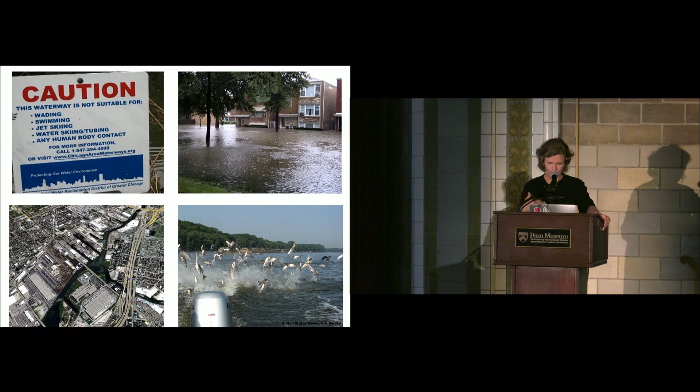Over the years, another vein of research has been on these waterways and spaces in the post-industrial landscape. We produced a book called Reverse Effect that explored the results of the reversal of the Chicago River. Originally the river was flowing into the Great Lakes, Lake Michigan, and about 100 years ago they reversed that flow to take the waste and pollution downstream. Today we have issues like water quality and flooding, and the danger of invasive carp coming up the Mississippi and making their way into the Great Lakes.

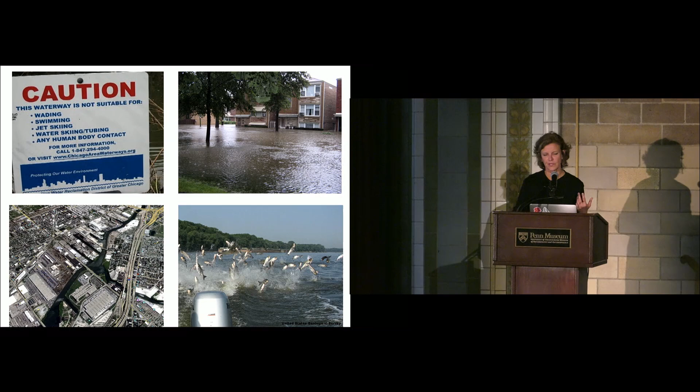So the river has a lot of issues, but it also has great potential. As you can see in the lower left, this former industrial space with privately held edges of the river could now somehow become a place for the city to make public space or give people access to the waterways. In Chicago, when we were doing the book, we started interviewing all the people using the river, even though it was polluted—people rowing, fishing, using it for tourism.

We decided to do a publication that would help public knowledge about the river, the conditions of the river, and what the future could be if it were to change. We took these images and, with help from engineers—I think architects are very good at connecting technical information and making it understandable—showed how the river could one day be disengaged from this reversal, and that our wastewater could be renewed and returned back cleaned to the lakes.

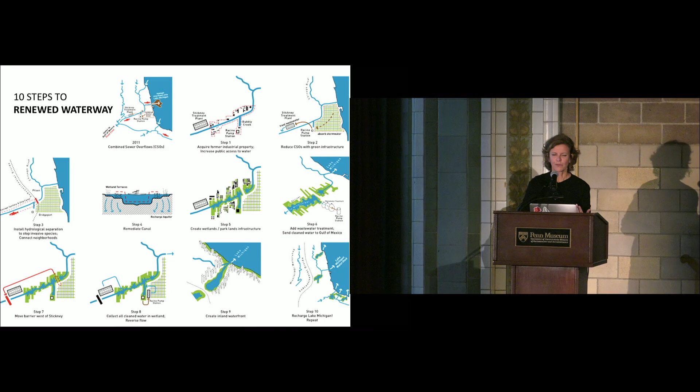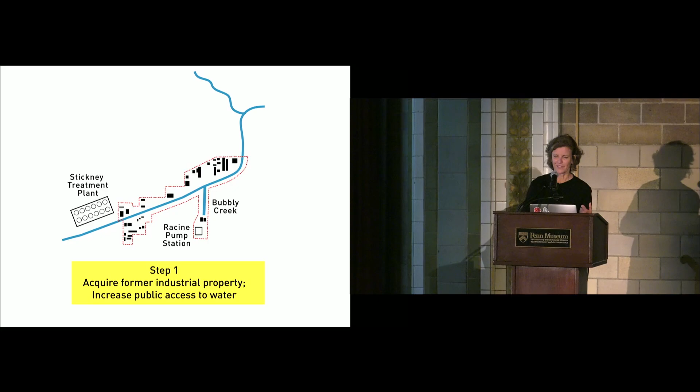In this book there was a series of steps to follow, and step number one was for the city to get some control along this river's edge and bring it back into public use. The reason being, if people can access the river, that's the only way they are going to be able to care about it. Sure enough, we got a new mayor in the city who took a look at this book—he probably heard it from other people too—but he really embraced the idea of making this river the new recreational frontier for the city.

Mayor Emanuel planned 4 new boathouses along the river, and we actually got to do 2 of these boathouses. The first one on the north side, in a place that was former industrial space, had a very limited time and a very small budget. We designed a boathouse that could also be used in the winter for training. These rowing clubs already on the river now have this as their home, using indoor tanks for training, and different groups like disabled veterans are also learning how to row, because rowing helps you prepare, be a good team member, and helps you mentally and physically.

What really makes me excited is seeing that this once abandoned riverfront is now an active place for engagement and for youth in the city to use. For the architecture, it really was important for us to make something exciting.

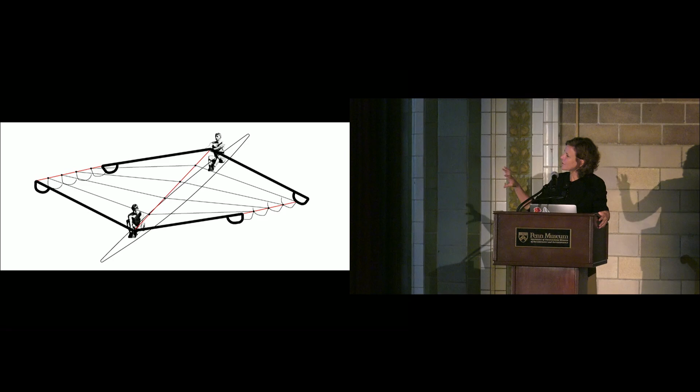We were interested in using the motion of these oars as a prompt. We looked at the whole flow of the oar and turned it into this roof form, using straight members like the oars, creating this up and down truss system that gives you a dynamic roof form, but also allows daylight in to warm the space.

It's been amazing to see this come alive and be one of the first steps. Now the city is also doing things downtown along the riverfront, trying to turn it into some big asset. I think this could be happening in Philadelphia as well.

This was really about discovering the work of Marie Tharp, who was an oceanographer. She was working at Columbia, and she had this theory that the ground under the water was almost mountainous, and at the time everybody thought that was very crazy. What she was doing was plotting this data from soundings. Because she was a woman, she was not allowed to go onto the boats and study the ocean, so she relied on this data, and she created this incredible drawing and map panorama of the underneath side.

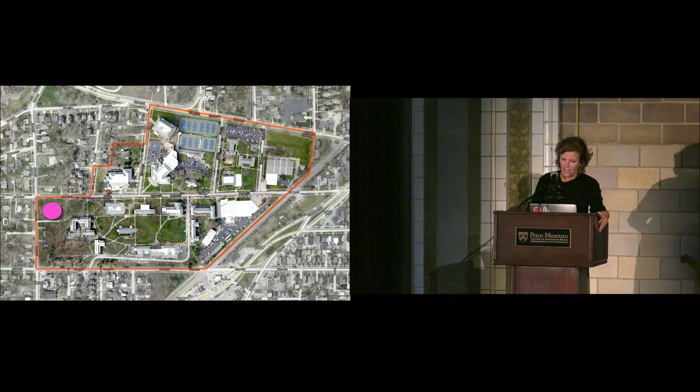One of the projects I wanted to show tonight is called the Arcus Center for Social Justice Leadership. This is a small project that's 10,000 square feet in Kalamazoo, Michigan. There's a small college campus there. The pink dot is where the building is located.

They have a strong social justice leadership program on this campus, and they wanted us to design a building that could both fit into the campus but also be the first ever building that's about social justice. The campus has some traditional brick buildings and some maybe postmodern brick buildings as well. But it felt awkward to use brick in this case, given the colonial aspect of the design of these buildings, and the client really wanted something new.

Because there was no precedent for a social justice center, we started to study the space where social justice happens in cities. What we found was it happens in the streets and the plazas and spaces like that - the demonstrations that are a result of so much planning.

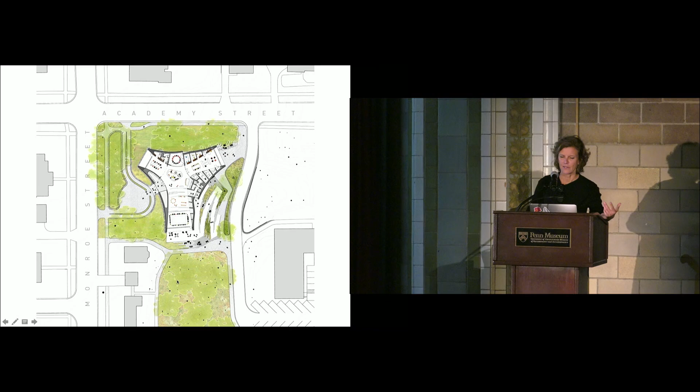That was something we heard from all the faculty there. They said what really breaks down boundaries is preparing food with each other, and sitting around a hearth so the neighbors can be invited in. It really wasn't easy to get a working fireplace and a kitchen in this academic building, but because it was so central to this idea of social justice and creating these relationships, we were able to get it through.

And so now the space can work for small groups and large groups. They have seminars there, conferences, and faculty spaces for work and classes. It was really an amazing project to work on, fun to try to understand what it means to be a space for social justice leadership.

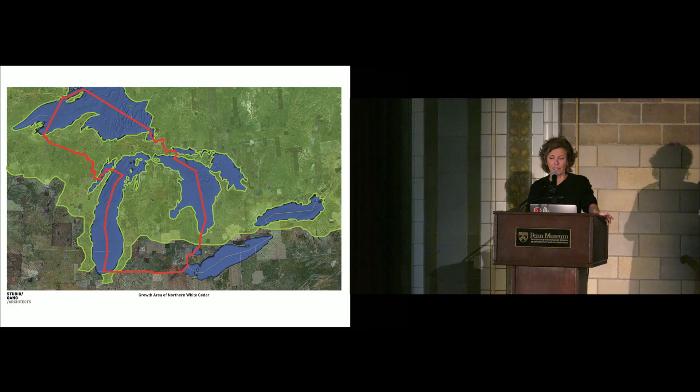One of the things that was interesting in terms of materiality was as we were driving to Michigan for some of our trips, we came across these amazing sustainably harvested forests. This is a white cedar forest, they grow white cedar which is very resistant to rot and insects. We stumbled upon this barn and other buildings done with this incredible wood masonry, some people call it cordwood masonry.

We started to wonder, what if we could revive that technique for this building? Because it really represents this idea of coming together with neighbors to build a structure and a really strong community.

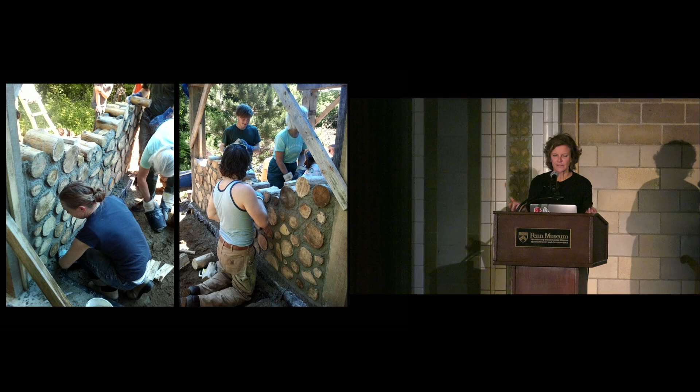Lo and behold, we found this couple, Rob Roy and Jaki Roy, who actually knew how to build saunas out of this technique. They were going around doing little workshops with people building saunas, so we asked them to come teach us and our contractors and masons how to do a cordwood masonry wall.

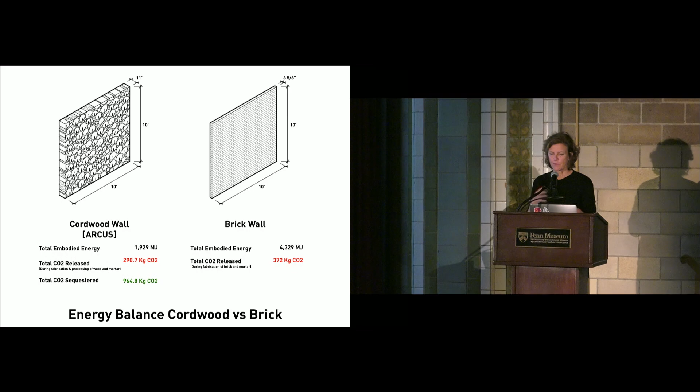The beauty of this wall is that it's really sequestering the carbon. If you think about a tree growing, it's absorbing carbon through its entire life. Then what you do is just dry this wood out. Actually, we dried out the wood for a year prior to putting it into the wall. So there's very little fabrication energy put into this wood, it goes right into the wall.

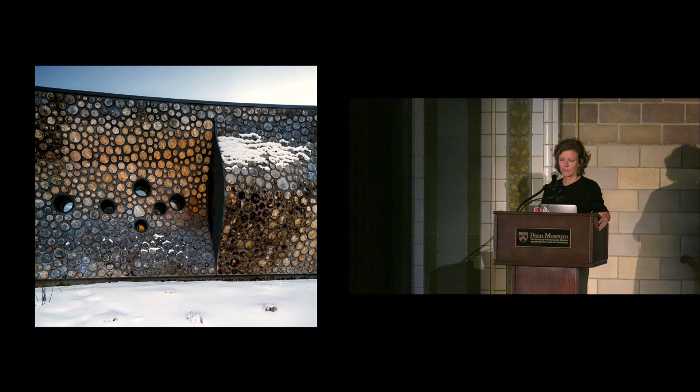And it ages too, with beautiful weathering to this material, and it really has a quality that connects it both to the brick campus, I think, but also makes something new.

Now this campus has really grown in terms of the number of events they hold for social justice leadership. They are really thriving as a school. And it's because of place, that there's a place they can gather, and it's a place that has an identity, no longer having to plan these things in the basement of a school where they used to be. So it was about creating relationships and basing the design on that.

In terms of tall buildings, they're oftentimes thought of as structures that are isolated or sometimes off-putting for community purposes. But we've been really interested in how tall buildings can also create community, because it's really the future, we need to make denser, more compact cities. So how can we encourage community in these tall buildings?

With the Aqua Tower, we were really interested in using the materials, the concrete, in a way that would give a benefit to the apartments, giving terraces so people could step outside and even see their neighbor.

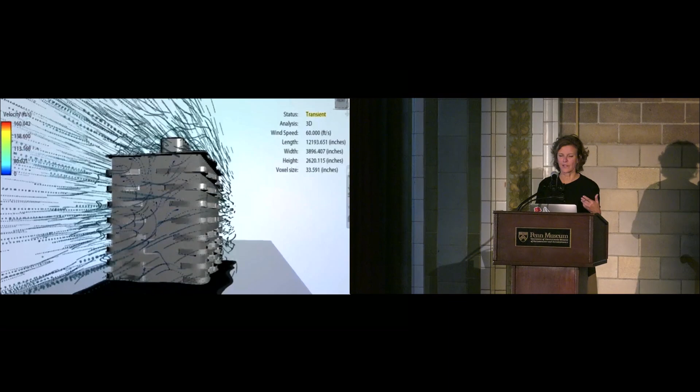We tested this in wind tunnels and found that the variations we were showing in the slabs were actually reducing the discomfort of the wind. In other words, you can use the balcony for a longer period of time in the year.

It was really based on this idea of using that space outside the building for social purposes, for connecting to the environment, connecting to the neighbors, and not thinking of a tall building as just a stacked place for privacy, which was really the feedback we were originally given. So we said maybe these offsets of these balconies could also allow you to have sight lines to your neighbors.

So it turns out that this building really attracts a lot of extroverts, let's just say. It's like people that want to be out in the city. There's a lot of students from the University of Chicago Business School that live there, empty nesters, people moving back into the city.

But one of the things I wanted to do better on was the performance of the building. Even though it's a LEED certified building and has pretty good performance, one of the issues is how the slabs could be disengaged from the inside.

So on the next building, we tried to find ways to improve the performance and also to continue to think about the social qualities. Not everyone's an extrovert—some people are introverts, and we wanted to make a building that could be used by both people.

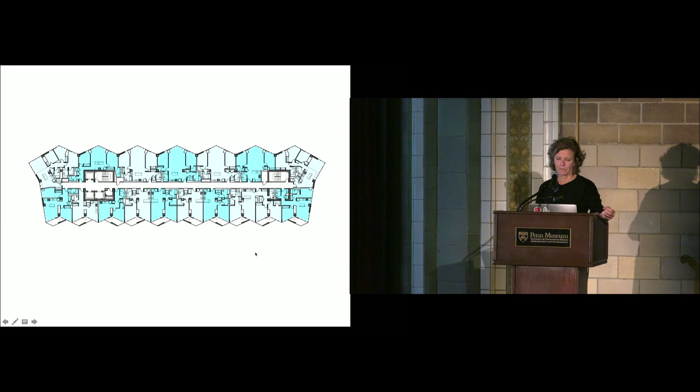So with the tall residential buildings, we've really been interested in how to make them more social. Here you can see the structure of the building.

These offset concrete panels are the columns of the building, but they also allow us to eliminate columns on these bay windows. You can see that the slab here is picked up by the panel here, but it's also hung from this panel, decreasing the span and allowing us to go column-free on the bays. But also, the key thing is it is the structure, so it's impossible to value engineer it out.

You can see the detail of this. This building went on a site that was a former strip mall, but now it has co-working space, a Whole Foods market, retail space, and on top of the plinth there's some social space for the building, and then rental apartments above that.

From the south side, you can see these, what we call balcony stems. The idea is that they take the gravity loads all the way down to the ground, but then there's an array of these stacked, almost like cards, stacked up that create this very dynamic outdoor space. You can see in this image the loads being taken down to the ground on the green stem—that's one of the stems.

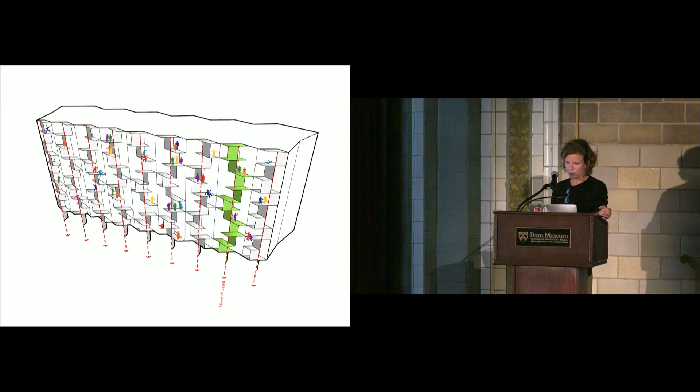What this does is it allows us to disengage the slab on the inside of the building from the slab on the outside of the building, so it can improve performance. Anyway, that's what we're testing on this building. I'm not 100% convinced it improves the performance that much, but that was the concept of it.

And you can see this incredible, almost Escher-esque space that's quite amazing in there. You can't look into someone else's apartment, but you can see them if they're out on the balcony. So we really treated this as a kind of threshold space.

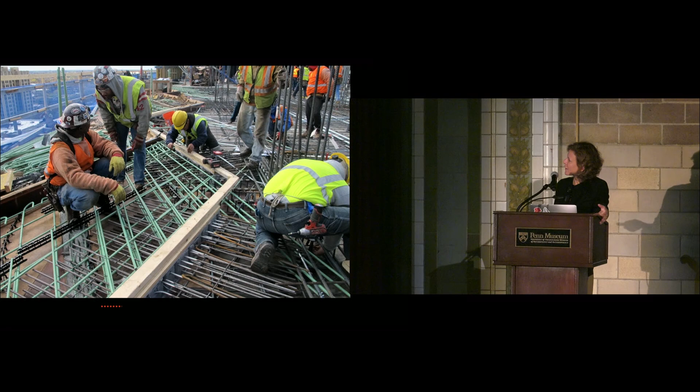And here is installing the thermal break, which is the first time it's ever been done in Chicago, by the way. We were really pushing for that on this project, and luckily we were able to get it installed and also install sensors so we can do a comparison of the performance—it's when you have a slab inside and a slab outside, to reduce heat loss.

But this is an ordinary building. It is not an expensive building, it's regular apartments. I've always felt like architects need to put our attention somewhat on living space in the city, because it is the DNA of a city. But normally these kind of buildings are really very basic and not very exciting.

So I'm happy to always be working on projects that I think will improve the city. This is one of them. Again, it's not a very expensive building. In fact, it was stalled after the 2008 downturn, and then suddenly it came back and turned from condos to apartments.

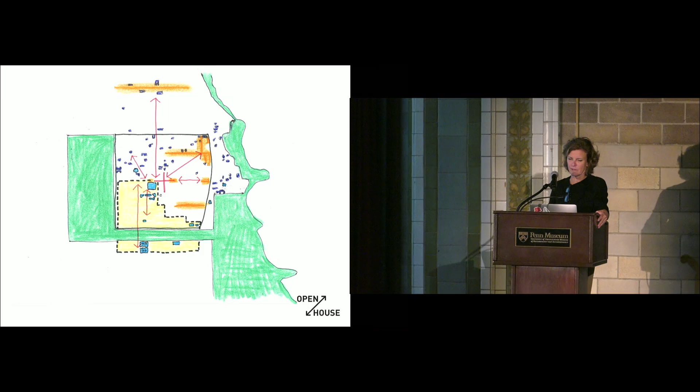And you can see the fabric. There's this beautiful collegiate Gothic fabric, but it's known for being cloistered and not super connected to the neighborhood around it. So the university wanted to change that and start to make a connection to the neighborhoods that surround it.

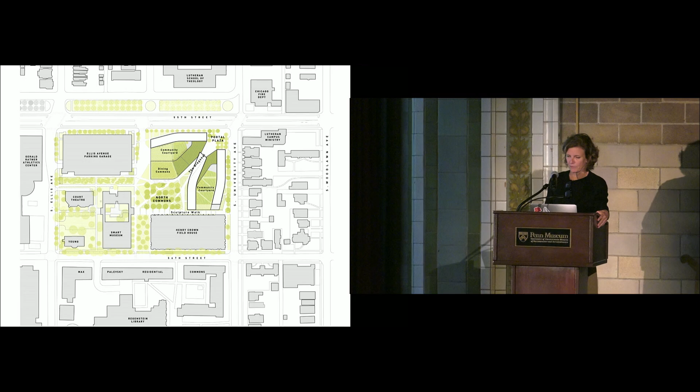So what we proposed was a series of these slender bar buildings that allowed you to walk underneath and come right into the campus North Commons on grade without any gates, inviting people in from the neighborhood and from the public. And scale-wise, this big wider boulevard on the north has the tallest building, stepping down to the more residential scale.

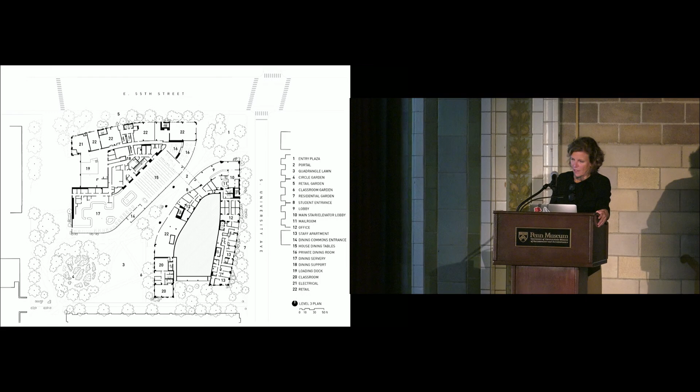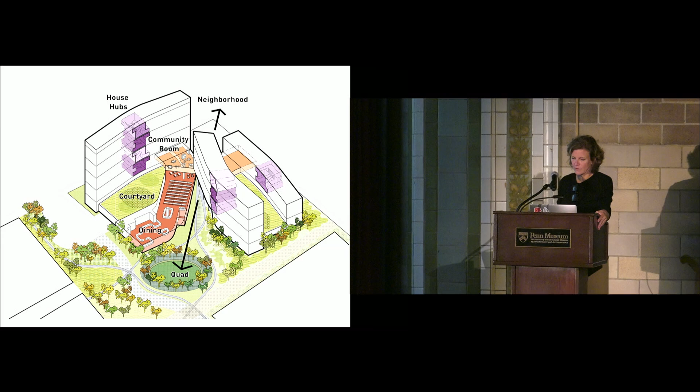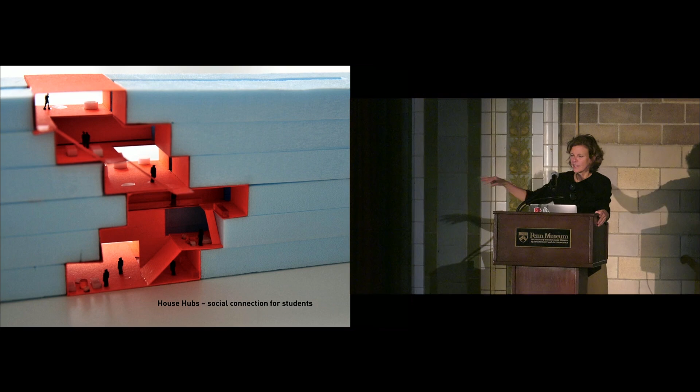So everybody comes in to one entrance for this project, 800 students, and they can either take the elevator, go up the stairs, and then they can communicate across to any of the towers. But the DNA of the project is really about this house hub idea.

This is the house, showing 2 house hubs. The idea was there's got to be a space where this 100 students, the university system of 100 students, can get together and create these social relationships. So we created this staggered section, with sight lines between 3 levels, almost like a townhouse inserted into the fabric of the tower.

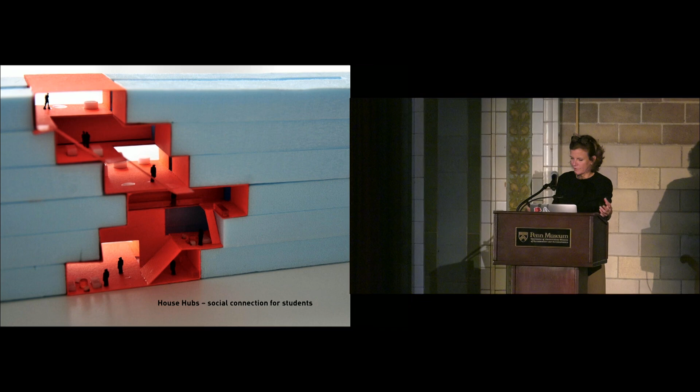And that place is where everyone from that house can gather and have study rooms, they can cook together. And that patterning ended up migrating and informing the facades of the buildings.

But hopefully they have already taken over the space and really made it their own. So each one has a little bit different character, and that will allow people to gather together and bond over the years.

We had the idea that the performance for this building is really to have a window that can open 100% and get 100% fresh air in the space. So the grill acts as a safety protection, but it allows you to open all the way up. And then we tune the facades based on the orientation.

And it's really interesting because there's no ductwork here. We're doing a radiant system. It's really energy efficient, and all the students can compete from the different houses on how to reduce energy.

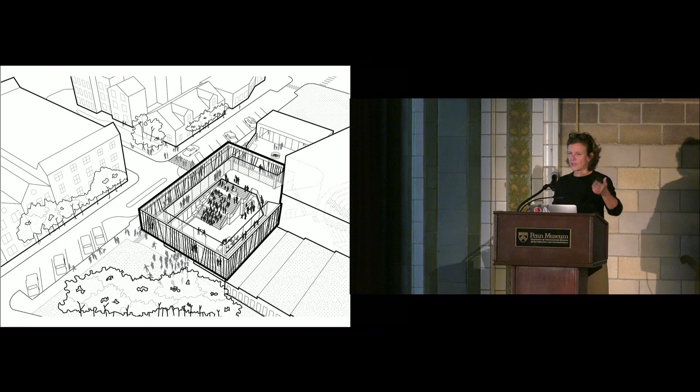And so we wanted to use wood in a really new way, and we created two venues, and then the lobby is actually almost like this third venue where after the theater, you can go hang out and talk about what you saw.

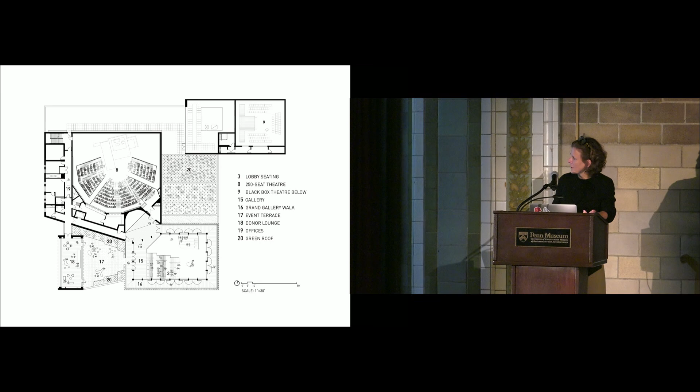So in plan, it's this thrust stage, black box, rehearsal space, and then this is a lobby that doubles as a community meeting space, a performance space, really serves a lot of different purposes. And on the second level, there's a walkabout similar to what we saw in the inn-yard theaters.

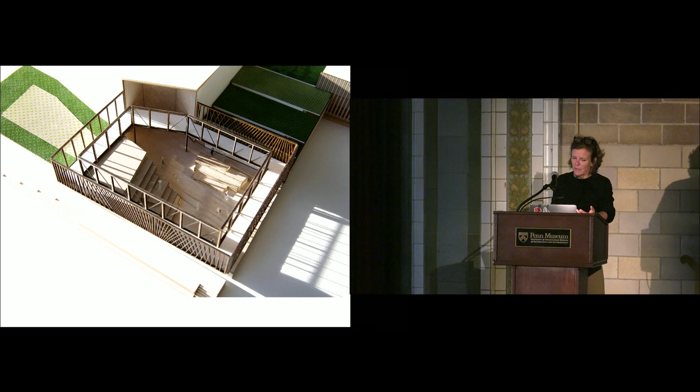Here's some more research about wood construction, and as we moved through the design process, we really wanted to push the limits of the new ways of using timber, which is either in laminated form but here in tension. Tension makes things thin and light, and it's a beautiful thing to see a structure in tension. So what happens is these Vierendeel trusses and the wood spanning over the top then hang down, and the idea was to hang this walkway around.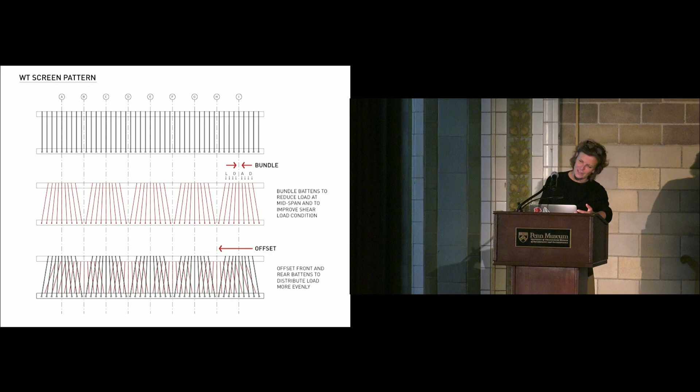At this point, I realized that the engineer I had was specialized in concrete, and I really needed a wood engineer. And so it was an incredible way of finding the ecology of the team as well, who could work together with each other to solve this problem.

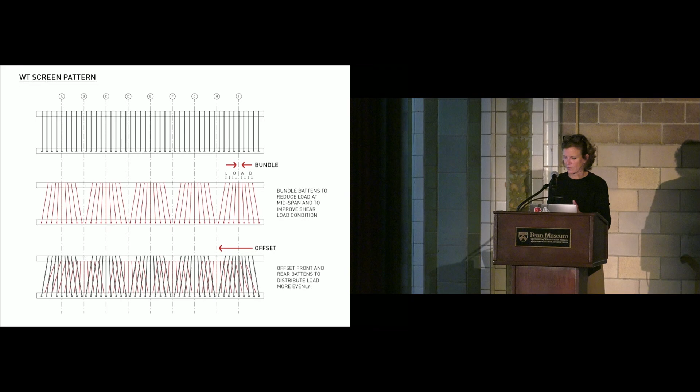Wood was not allowed to be used in this way for the structure, so we needed to show that it could be done. This is a detail at the bottom we call the cat's paw, and it's a brilliant way of holding in tension. You can see this cavity, adding wood into the strand, the batten of wood to give it more mass instead of putting a bolt through it, which would take away mass.

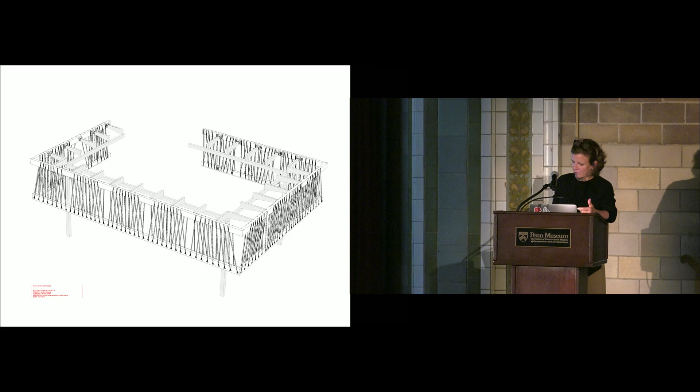We also had to find the people that could do this work—it's not the usual kind of work you'd get from a carpentry shop these days. We discovered this guild out in the middle of Illinois called Trillium Dell, and this is their site. Some of the work they do is disassemble barns and salvage the wood. They're really brilliant, a very international group located out here.

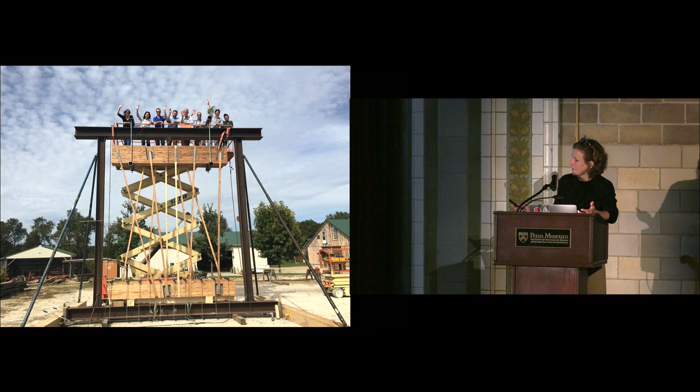And they helped us to mock up and test. This was like a rig to pull these battens apart, and we were able to show that it could do what it needed to do, and it passed the test and was approved to use in Glencoe.

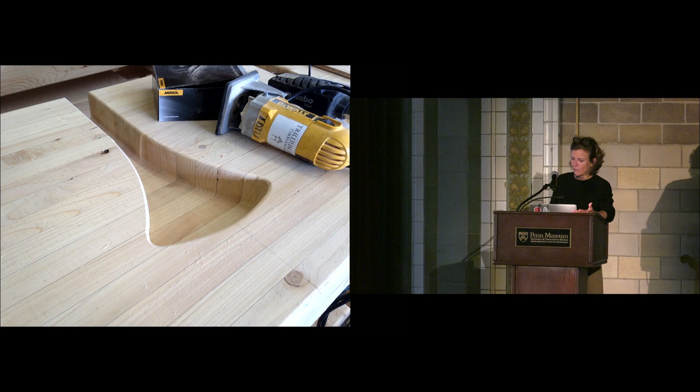That's the lightweight engineer, Peter Heppel, there, and our team on the rig. The good thing was the wood never broke, and then the rig started to almost break, so we stopped the test at that point.

But here is the way that the glue laminated wood is routed out to accept the cat's paw, and this shows putting the wood into the cat's paw, into this mold, the flare, which ends up like this. I learned a lot too, and they let us make some of these things, which is really cool to be an architect and be able to participate a bit.

I also learned how to throw an axe when I was out there, because that's what you do for fun in the middle of Illinois in the middle of the winter.

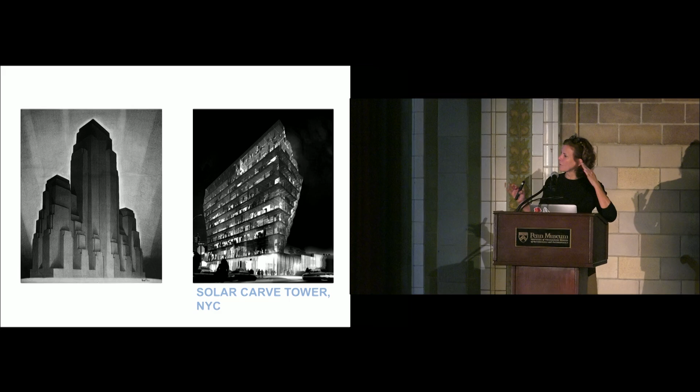This is a 1916 zoning ordinance in New York that determined that all the buildings would be these step-back skyscrapers. The whole purpose of it was to preserve light and air to the city public space and street, which is really great.

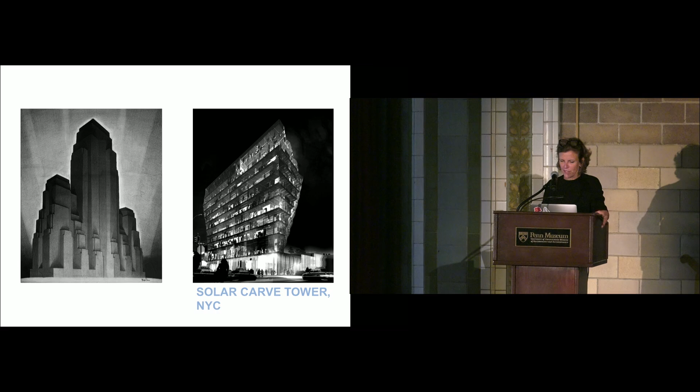This is our building, which when you look at it, you might think, wow, that looks the opposite of solar carved, but it's actually designed specifically for its place to benefit the space around it.

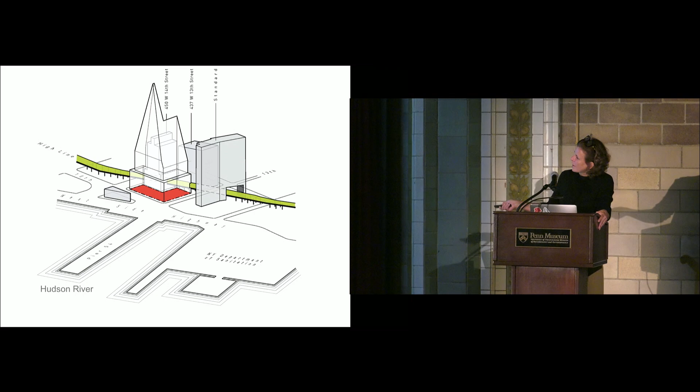In the New York Code, you get this zoning envelope, I'm sure you've seen it before, and it produces a certain footprint. Our site happens to be along the High Line, which is this green line here. This is the Standard Hotel, and it happens to be along the Hudson River in Manhattan.

If we would build as of right, we would be able to do this L shape, and it would really crowd out the High Line, which is interesting because, in fact, it is a public space, but it's unusual because it's in the middle of the block.

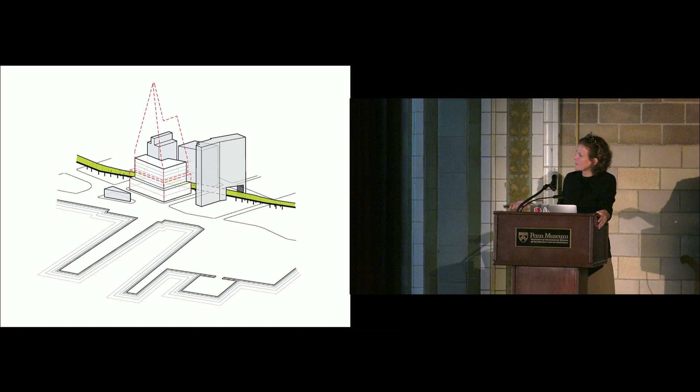What we discovered was that maybe we need to respect the light and air to the High Line in this case, seeing as our site is right along the river.

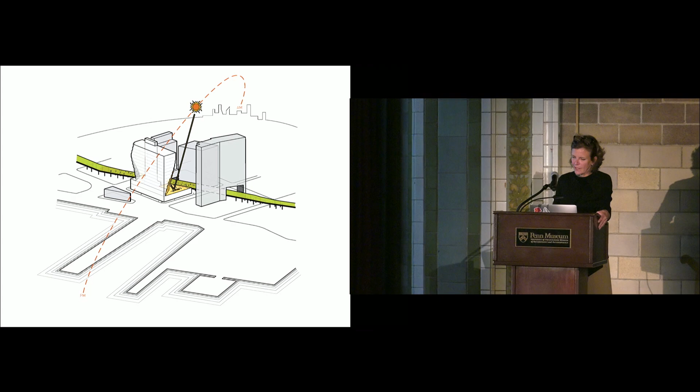So we went after an idea of replacing volume from here, cutting it back and doing a higher building, and then going about carving it with the angles of the sun.

So that people walking on the High Line would still be able to have views to the river, and then these other carves would begin to reduce the amount of shade on the High Line.

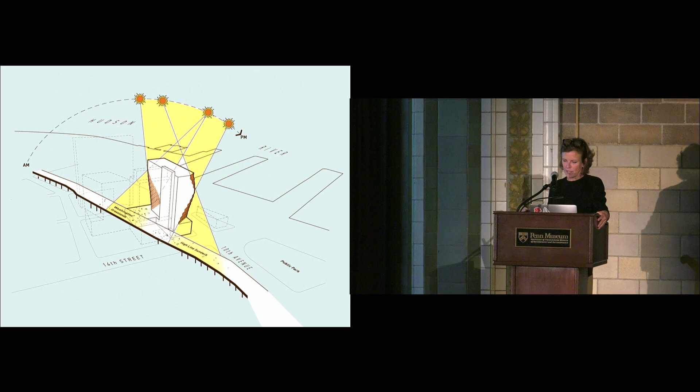By doing this, we are able to preserve 200 more hours of daylight to the High Line during the growing months. When we presented it to the city, because we needed a variance, they saw the logic and they approved it.

It was really great. We had these different variations, trying to get as much FAR as we could, but if we ended up going down, we would just increase these carves.

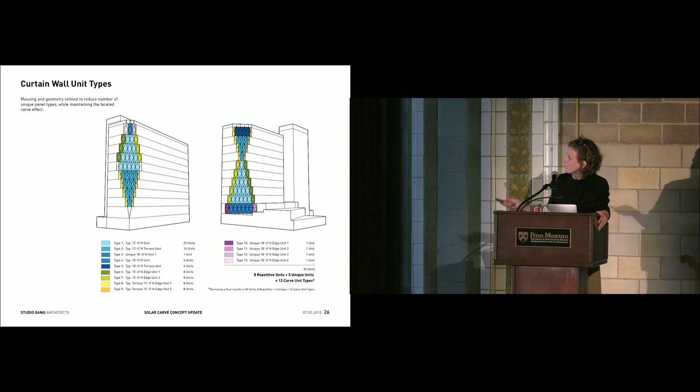We're really excited to see this building come around. These are some of the studies about this faceted portion where we carved out the building to make it more special in those areas. This is under construction now and should be finished next year, so really exciting.

Finally, I wanted to talk about how the research takes us into areas in our cities to understand relationships between people.

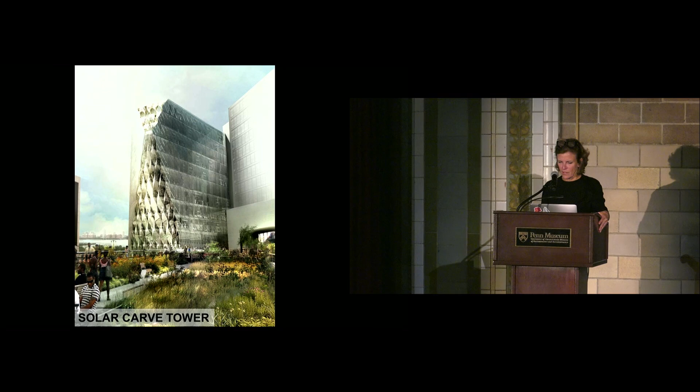This project is the last project I'm going to show. It's really about responding to a couple of things that were happening around us and wanting to see if architecture could somehow have some positive contribution. We were designing a fire rescue building in Brooklyn, New York.

What I noticed with the fire rescue team and the rescue workers is that they always had a very strong relationship to the neighborhood around them. Everybody loved them, and they liked each other too.

So the building, doing the fire rescue building, got me thinking about police stations. Why are they so different? Why do they look like fortresses?

And also, obviously, the terrible confrontations between police and community members is a symptom of something that has gone wrong in the relationship. So we started to think about what a new police station could be, and if it would somehow be different than what we currently have.

We used points that came out of a study, the 21st century community policing, and there were these different pillars that addressed all of the things that need to reform in policing. We took each of the pillars and tried to see if it could be something physical, a spatial element, applied to a police station.

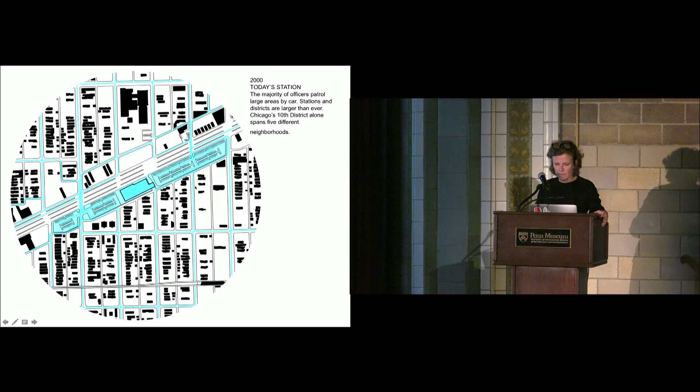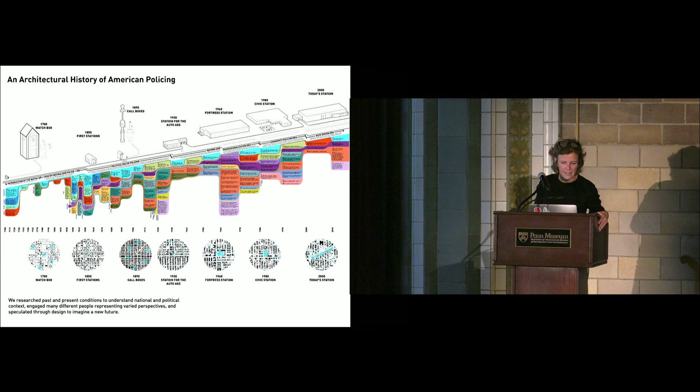This is some of the research we did on the history of policing, which is very complex, especially in America—different in the East and North, from the South, from the West.

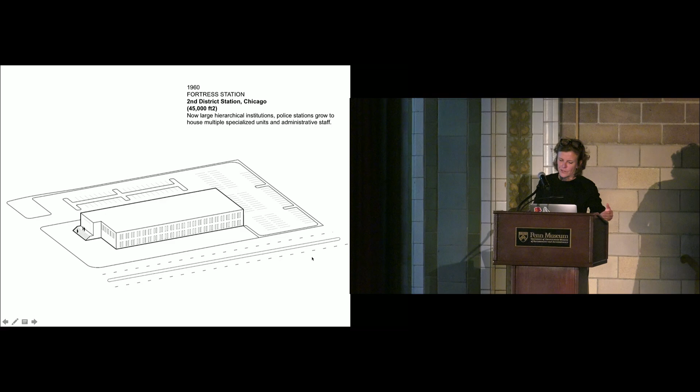We focused on the Chicago station and found that most of them were fortress-like and really keeping people away. Chicago did this thing where 15 years ago they started building prototype police stations, which were all pretty much identical, but they didn't ask the communities what they wanted. They just used the prototype throughout.

When we looked at our site, this hypothetical site, we thought, let's test out some of these ideas.

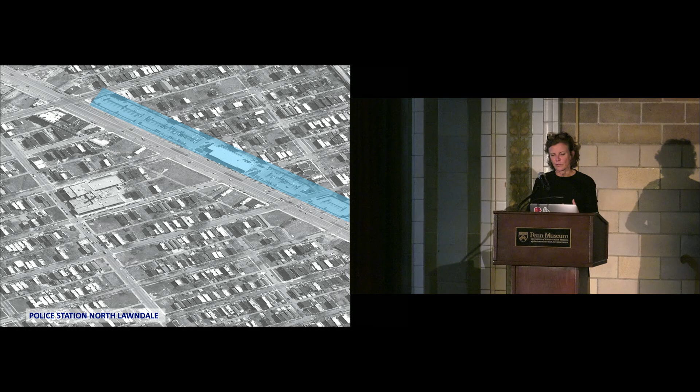We found that we wanted to connect with the community that lived there, but also with the police. So what could they have in common? If we asked them what they would put in their police station to make it possible for police and community members to have better relationships, what would they say?

This was one of the meetings we had, with both police and community members participating. What came out of it was really interesting. These are architects from our office engaging with people and drawing what they were saying, not what we thought.

One of the cool things was people came up with ideas like, if you really want police and community members to talk to each other, we need to have a barbershop in the space. But also like a computer lab for learning. A lot of the stuff was really great.

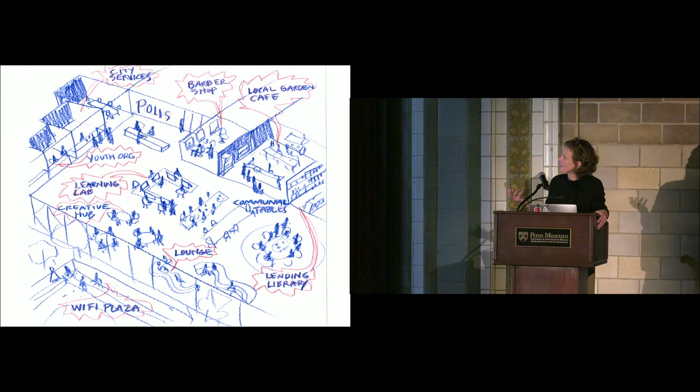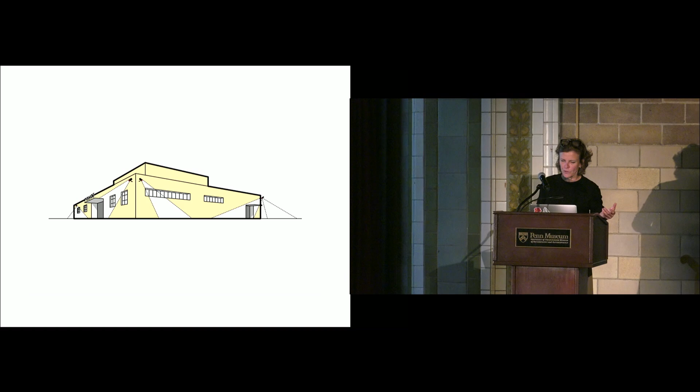Could you imagine having these things on the public side of the station, really starting to create more opportunities for people to meet each other? So you would have a police station going from something fortress-like to having this kind of openness on the public side of the station.

We also applied these ideas to the neighborhood itself. One of the things we found was that both the cops and the kids like sports—that's a good way to connect. They had all this extra parking, so we thought of introducing sports courts on the parking.

It was interesting because we were able to raise private money to install and build a half court on this police parking lot in so little time. Everyone was really looking for solutions.

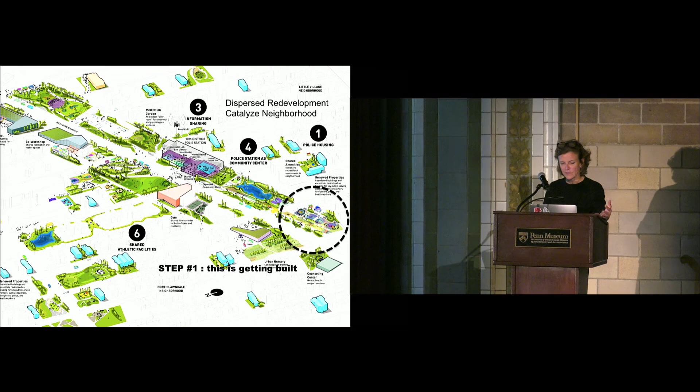We went back a year later and asked people, and found out that this court is being used a lot. Actually, the cops now have basketballs inside the station that kids can borrow, and once in a while an officer joins in. Small steps, but an idea about how to create community and use architecture to build trust.

So in the future, maybe you would go into the station and have other services, city services. There could be a barbershop, a community room, Wi-Fi, and things that would just make it a public building on the public side of the station.

There was academic input of scholars looking at these issues, community leaders we engage with, community members, government people, especially in the parks districts, and the police themselves, as well as philanthropic donors, to come up with what we call actionable idealism—something idealistic, but let's get it built and start testing it, measuring it.

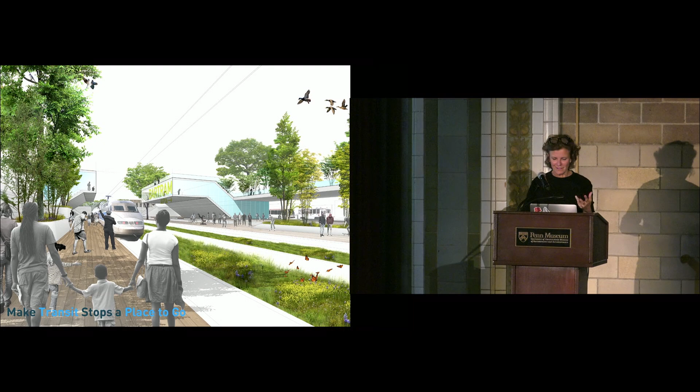So other things I have on the boards to show you and wrap it up: we're working on the American Museum of Natural History in New York. It's a new wing—a very important project to bring science and introduce it to youth, all the way up to PhD levels, to get people excited about science.

We're turning a former powerhouse on the Rock River into a new health and recreation center, believe it or not, for Beloit College. We're also working on some taller buildings, residential and mixed-use, in San Francisco on Folsom Street in the Trans Bay area.

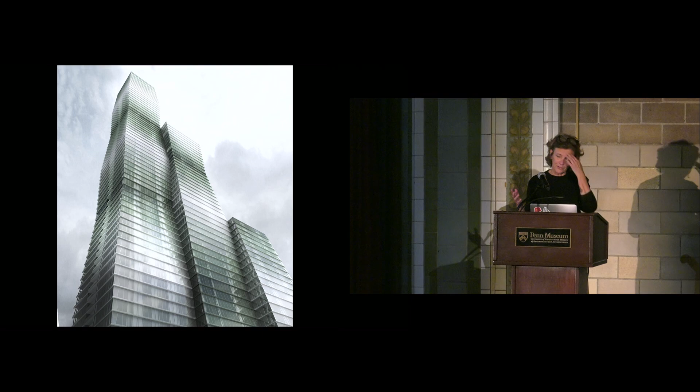And I've got one building under construction right now in Chicago that will be taller than the Aqua Tower. I never remember the number of how many feet it is, but the guys in my office always remember—it's 1,113 feet or something like that.

That building is really interesting in that at the base it connects people to the river. We're also doing some work with the Sweetwater Foundation in Chicago, an urban agriculture group in the Washington Park area. And we are working on our culture and our office.

I wish all of my team could have been here tonight to listen to the lecture and join in the conversation, but that's us. Thank you very much.